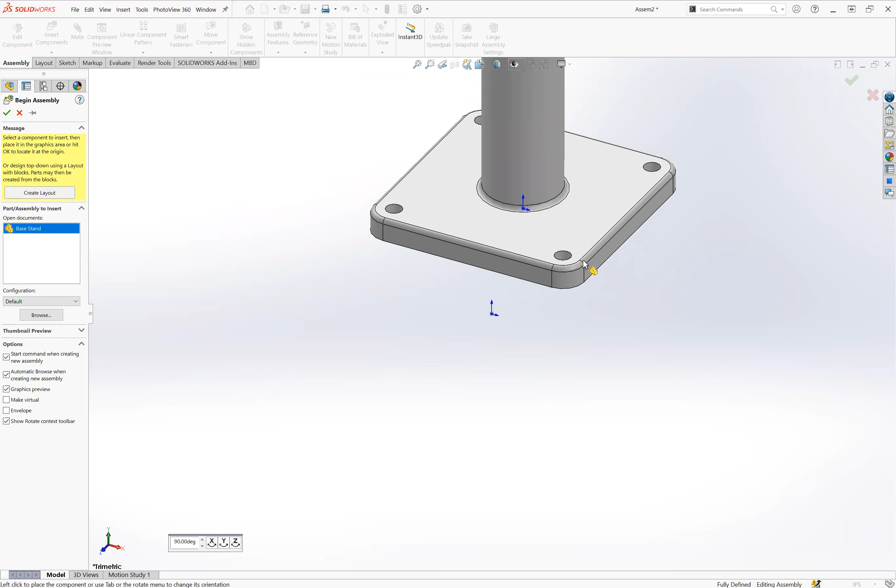You always want to attach your first part to the origin. Right now mine are hidden, so I'm going to click the arrow next to the eye and make them visible. I'll click that one and that one. Then I will just click on the origin right there. Now you can see there's an F next to base stand, and it is fixed to the origin. Therefore, this part cannot move.

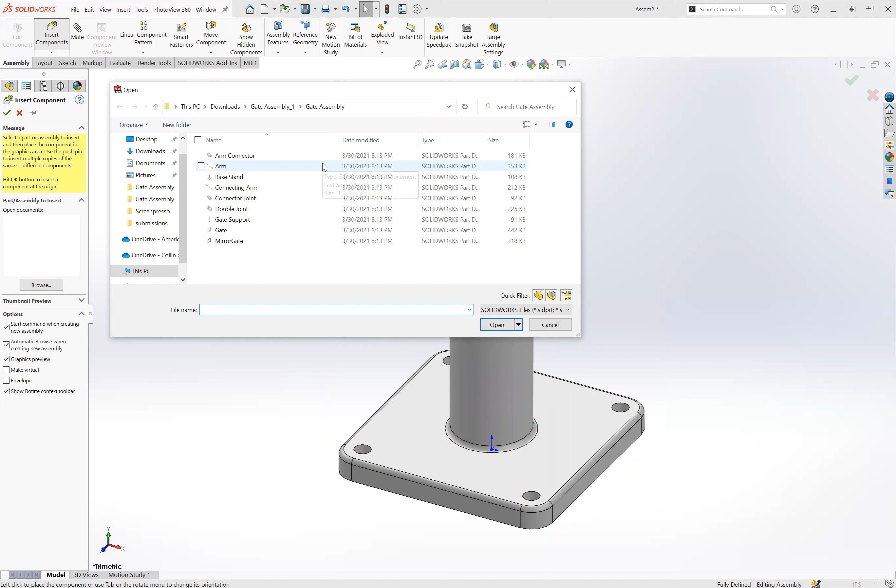Then I'm going to go into insert components. So click that, and I'm going to insert all of the other components. We have 8 total. We're going to insert the arm connector, and we'll just place that about right here. We'll do that again for the arm.

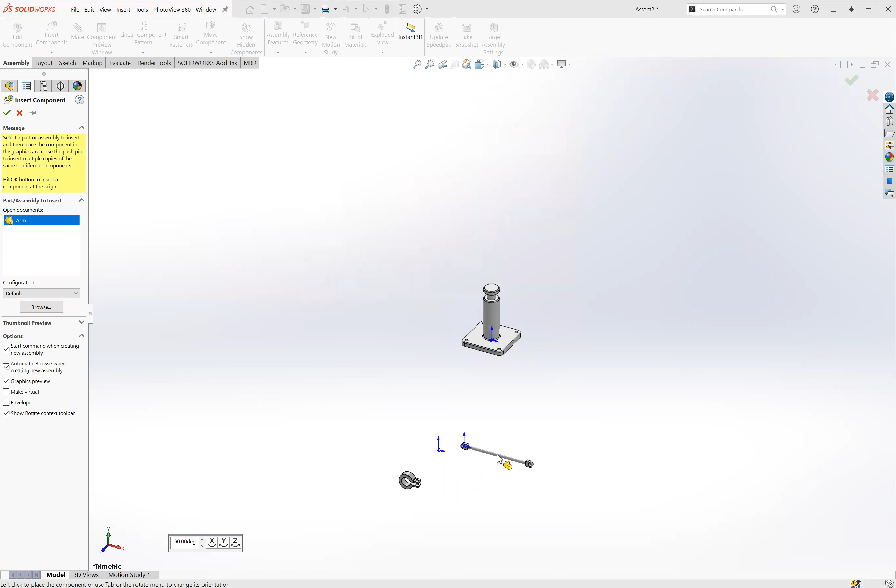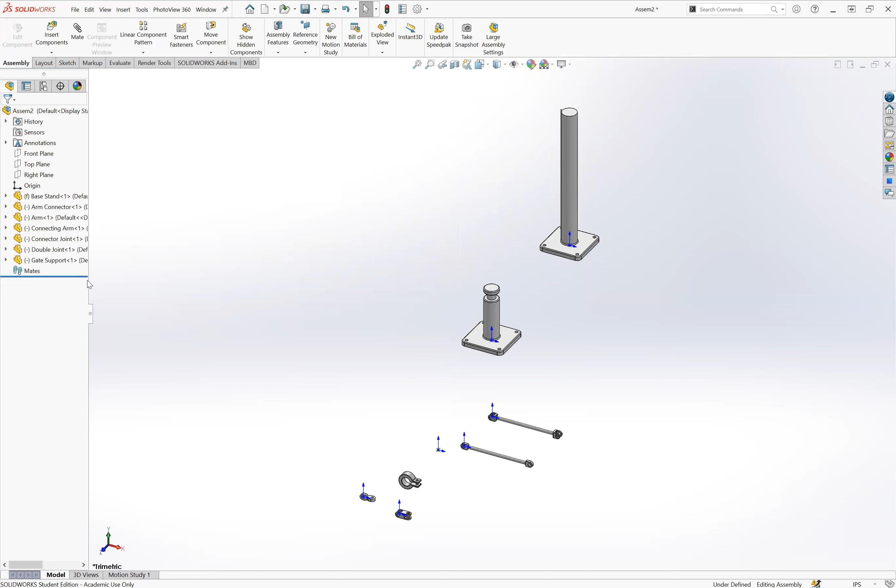You can hit enter on your keyboard to rerun the command. We'll do the connecting arm, the connector joint, the double joint, the gate support, and then we have one more, which is the actual gate. So click gate and open that and place that somewhere over here.

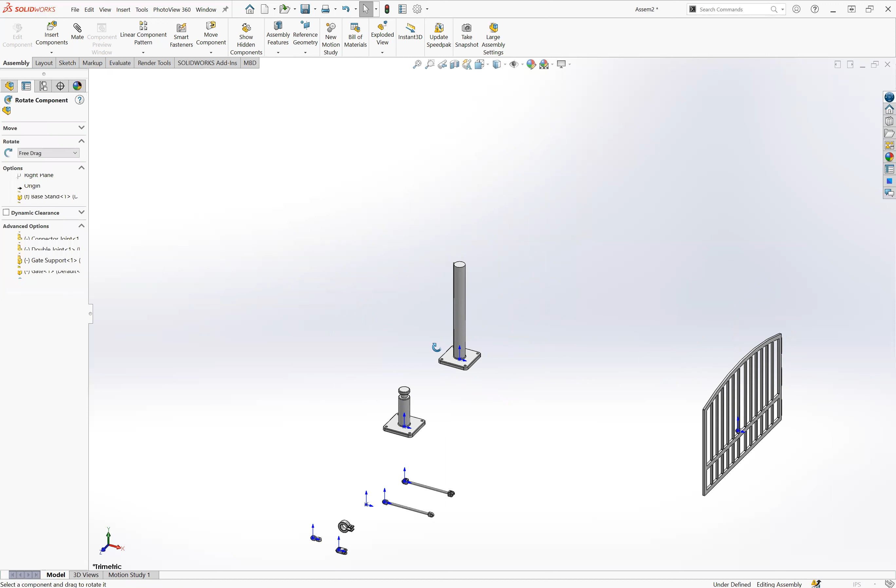All right, so now we have all of our components in here. Step 3 is to add a distance mate between these 2 components right here. But first we need to rotate it so that this area right here is facing us. So I'm going to click the arrow under move component and click rotate component, and then I'm just going to rotate it this way so that it is about right there.

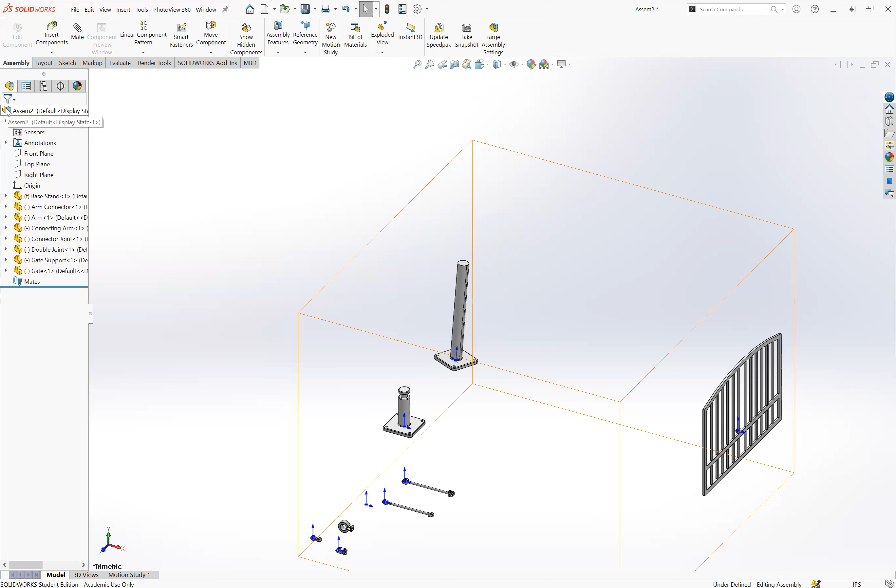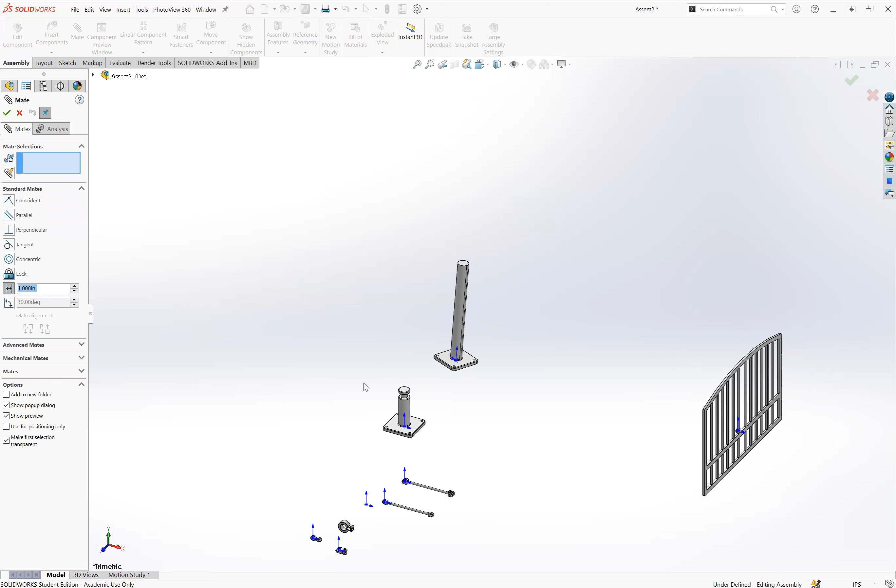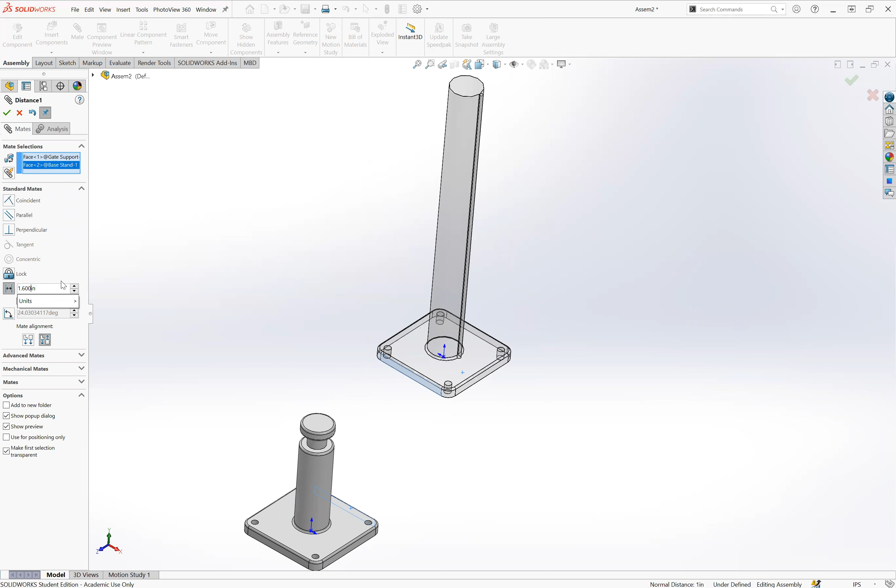And then I'm going to click check. All right, and now I'm going to add a coincident mate or a distance mate first. So we're going to click mate, and we're going to add a distance mate, which is this one right here, between these 2 faces here. So this face, and then rotate this over here in this mate. All right, and that's going to have a distance of 7. I'm just actually going to type in 7 inches here. And then I'm going to hit check. We know now that a mate is applied.

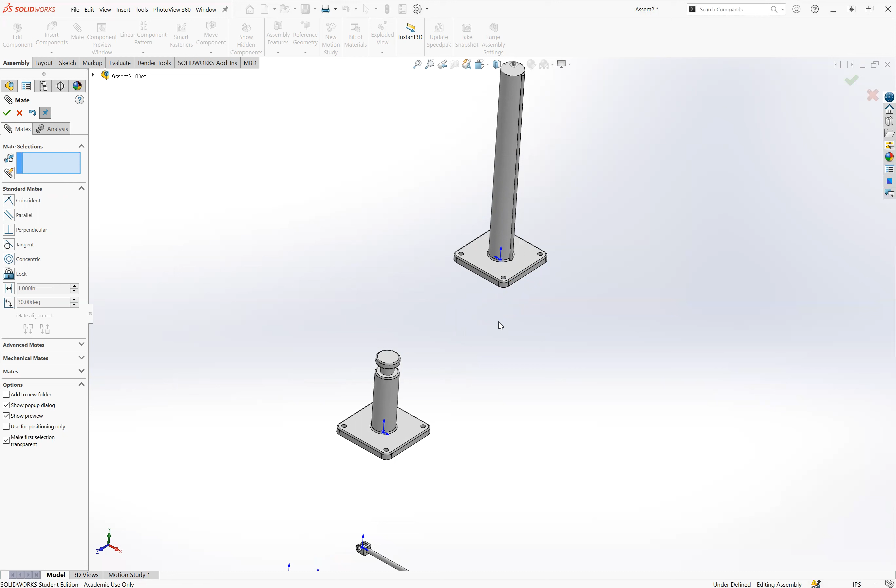Step 4 is to add a coincident mate. So I'm going to add a coincident mate between these 2 faces. Check. Right, and then I am going to add a coincident mate on the bottom 2 faces here. Check, and then I'm going to hit Control-7 to put this in ISO view.

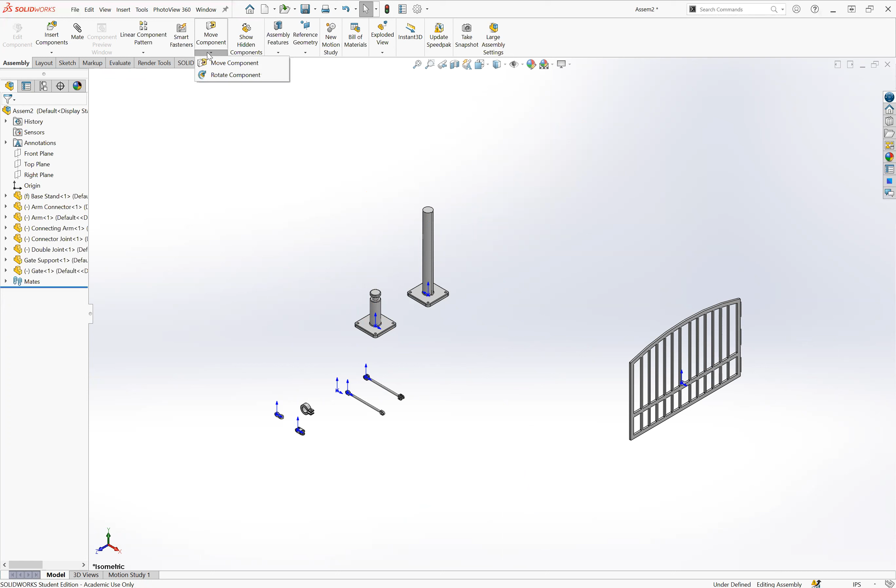All right, and then we are going to add a concentric mate between this part of the gate and this part of the gate support. However, I'm going to click check to exit out of that, and I need to rotate the gate first to make it easier. So I'm going to hit rotate component, then I'm going to click the gate and just rotate it and click check.

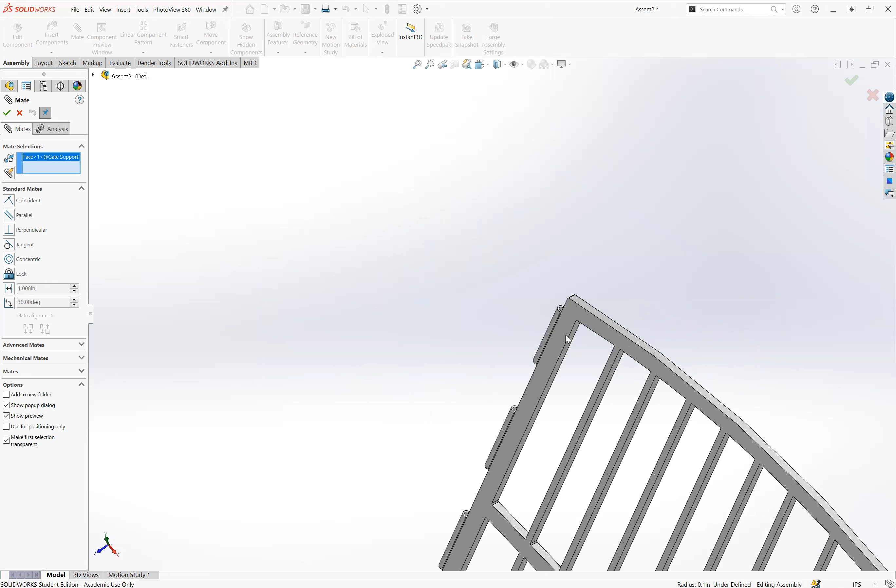Now I'm going to click mate again and add a concentric mate. So I'll just click this cylindrical shape here, and then I'll click the outside of this right there. And it automatically detects that we want to add a concentric mate. I'm going to click check, it's correct. And then I'm going to add a distance mate between this part of the gate support and the bottom face of the gate.

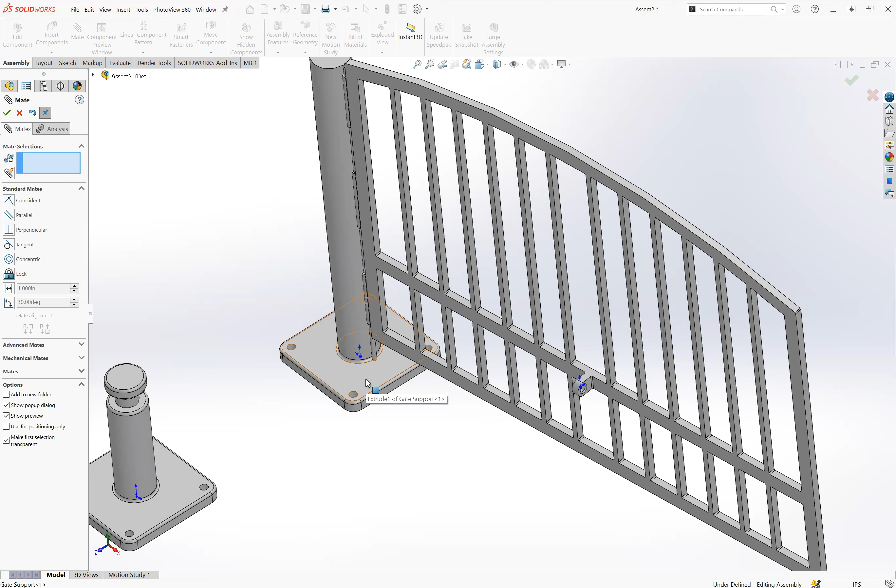So I'm going to put this over. We're going to add a distance by clicking distance, and we want a distance of 1 inch. Okay, and then we're going to click check.

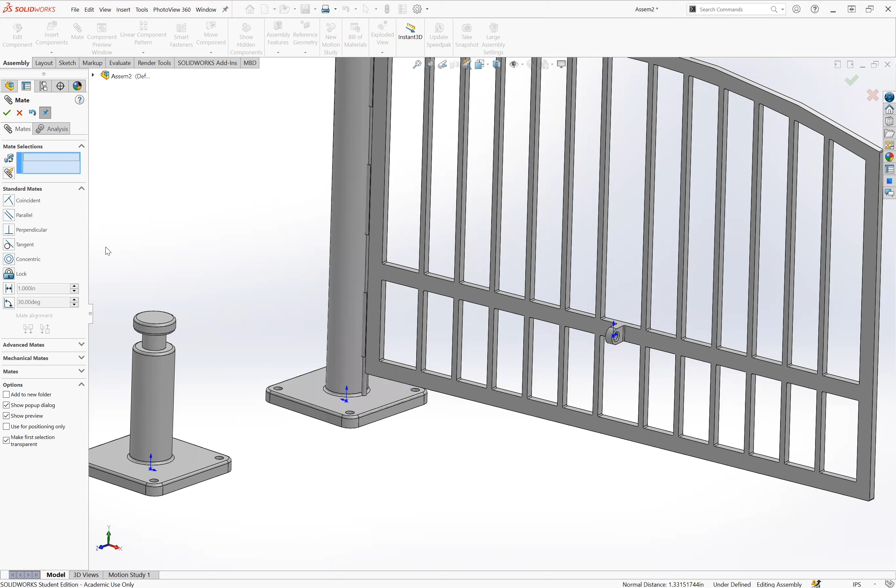Right, now we are going to move on, and we are going to add a concentric mate between the base stand and the arm connector. So I'm going to select this one, and then I'm going to select this one right here. And it guessed we want a concentric, it was right, so we're going to click check.

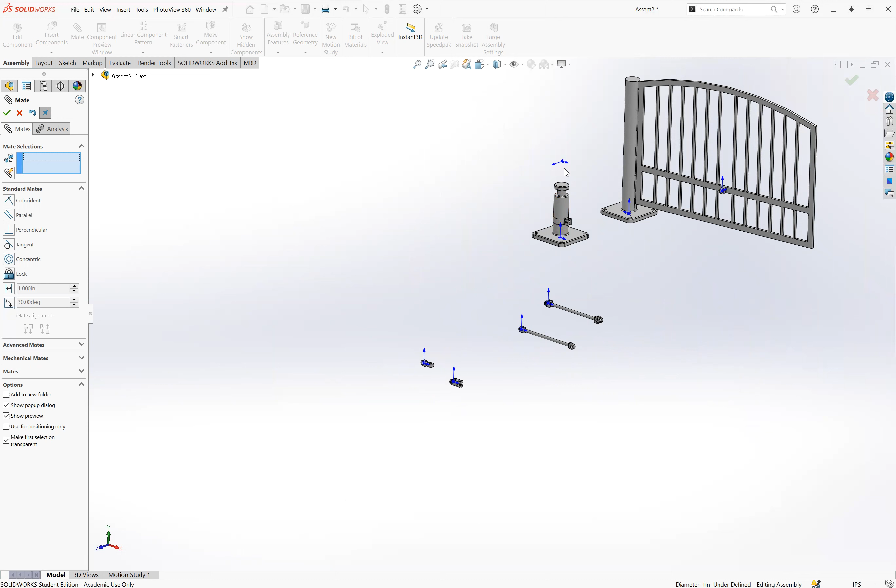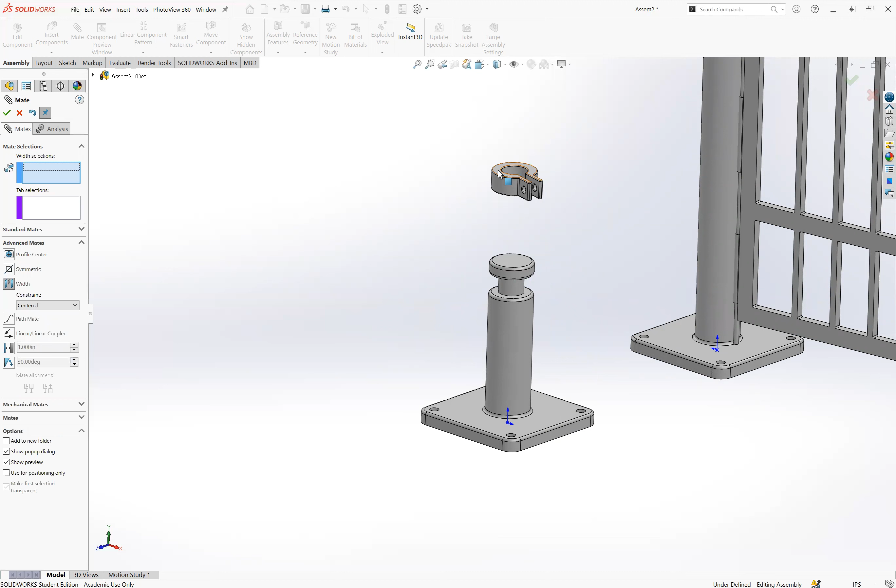Right, and then I'm going to actually click and drag this up so I can see it better. You can use the graphics window to move your components if it's not fixed or if it's not constrained. So we'll click advanced mates, click width, and then I'm going to click first this space and this space. And then for my tab selection, I'm going to click the two that I want in between, so those two faces. And then I'm going to click check, and the width mate just puts this in between the two faces that you select.

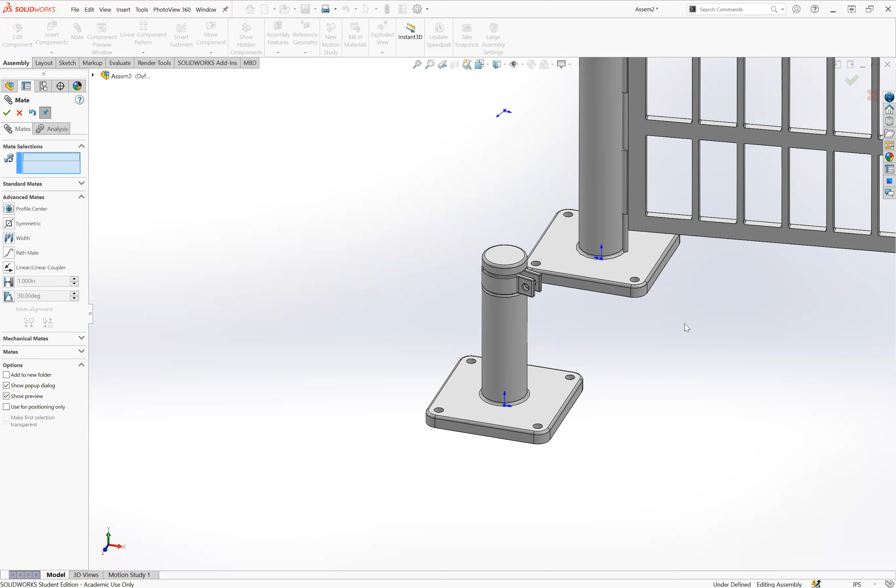All right, and then I'm going to add the arm connector to our assembly. So the arm connector is this one right here, and we'll first add a concentric mate.

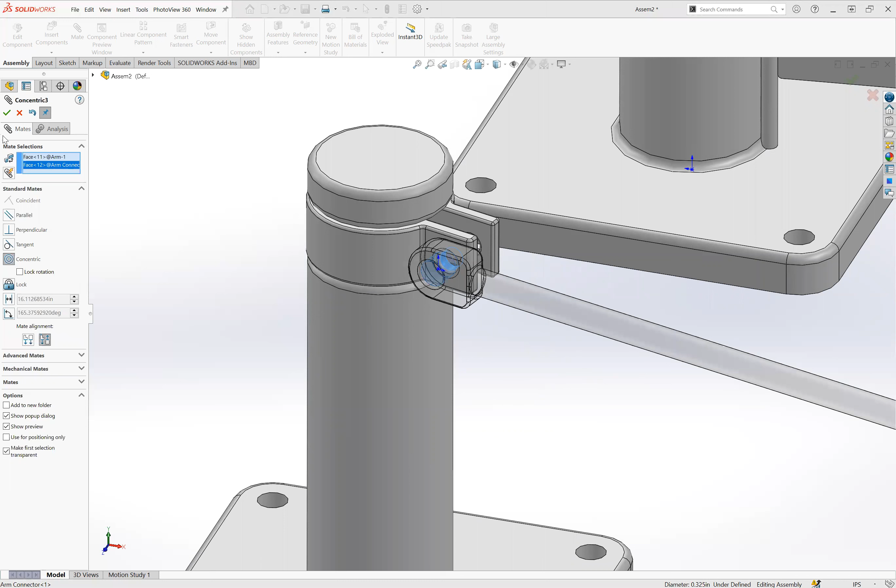And then a concentric mate with this part. I'm going to expand the standard mates, click concentric, and check. I'm going to move this out a little bit so it's easier to see. Now I'm going to go to my advanced mates and add a width. I'll click this one and this one, and then I'll click this face and this one that I want it to go between, and then check.

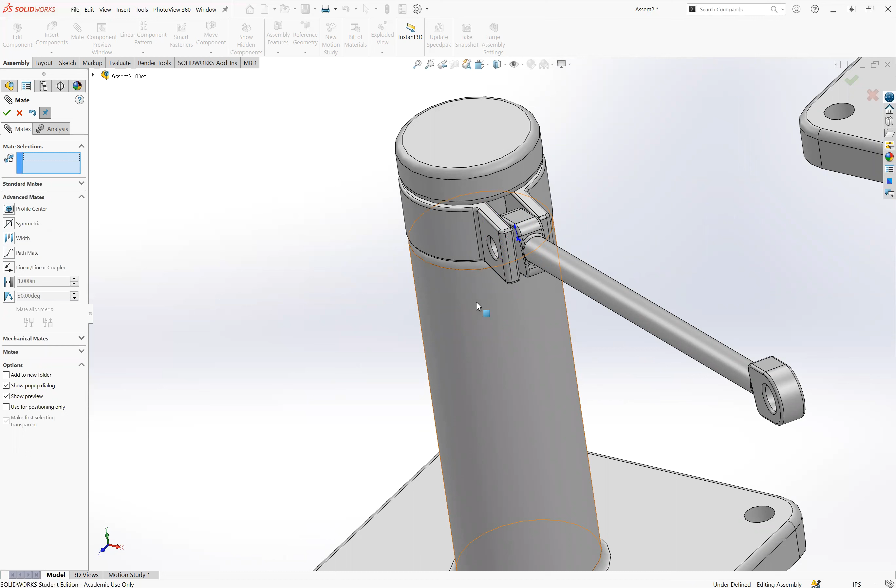Now we're going to move on to add another concentric and width mate. We're basically going to be adding concentric and width mates over and over again, so you'll have a lot of practice with that.

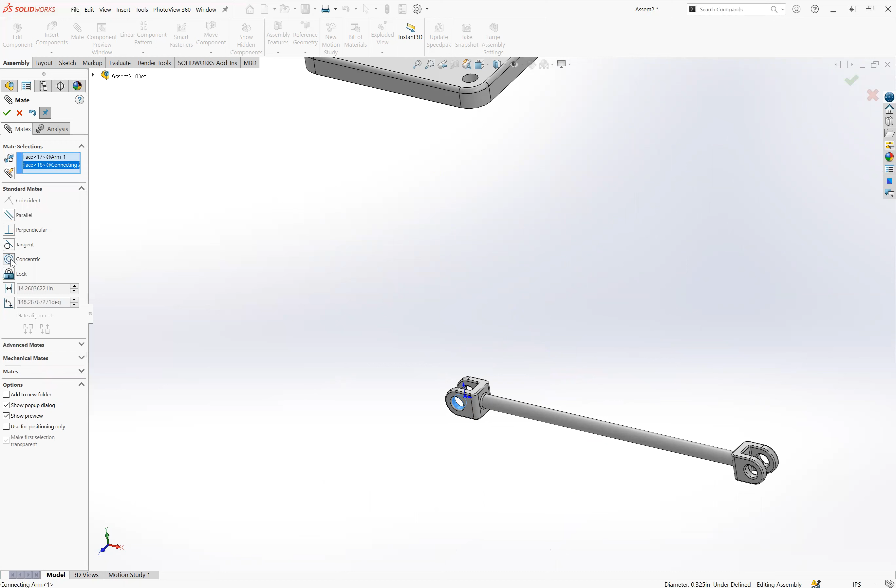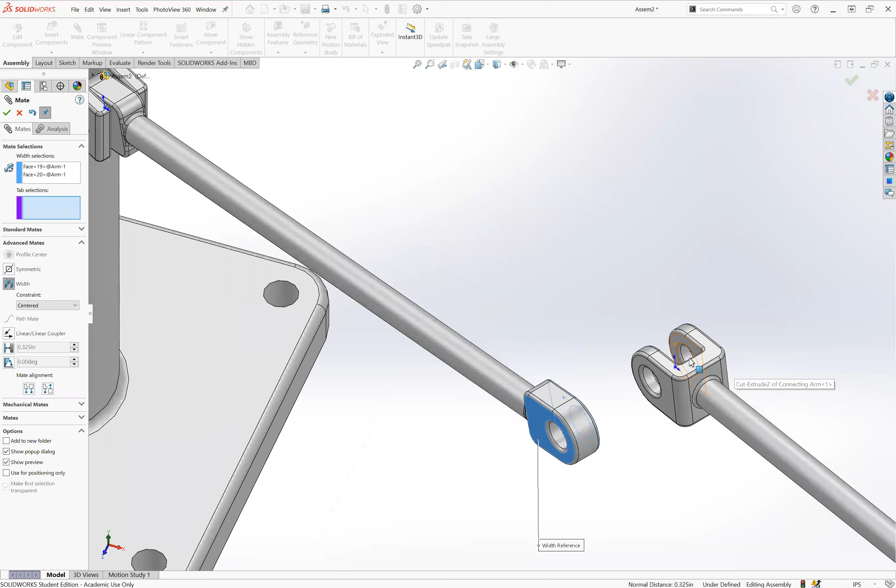We'll add a concentric mate between this one and the connecting arm. Just click on the connecting arm, expand standard mates, and click concentric. Check. Now we'll just need to add a width mate between the two. We'll expand the advanced mates, click width, and select these two faces, and then select these two faces here. Then click check.

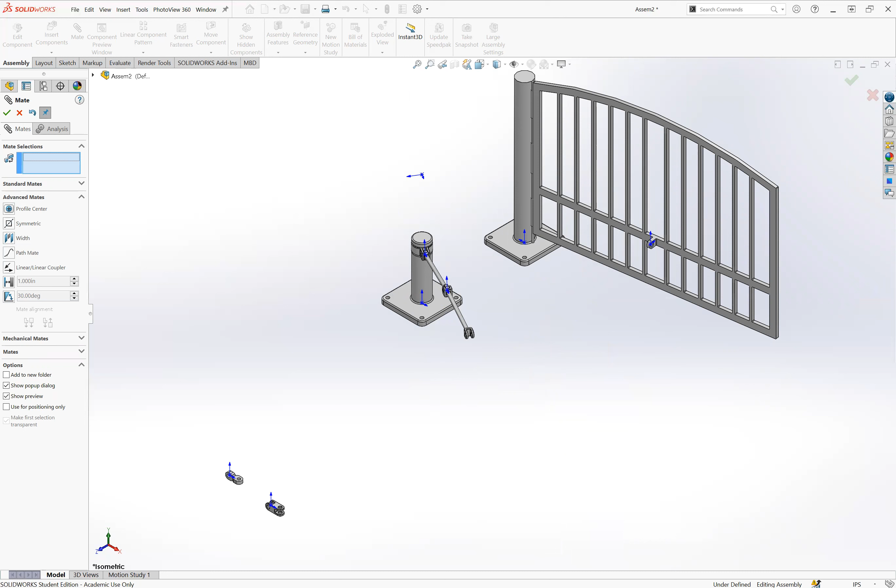I'm going to hit Control-7 to put this in ISO view. And then we are going to add these last two components here. So this one's going to go first, same thing, concentric and concentric. And then we are going to add a width mate.

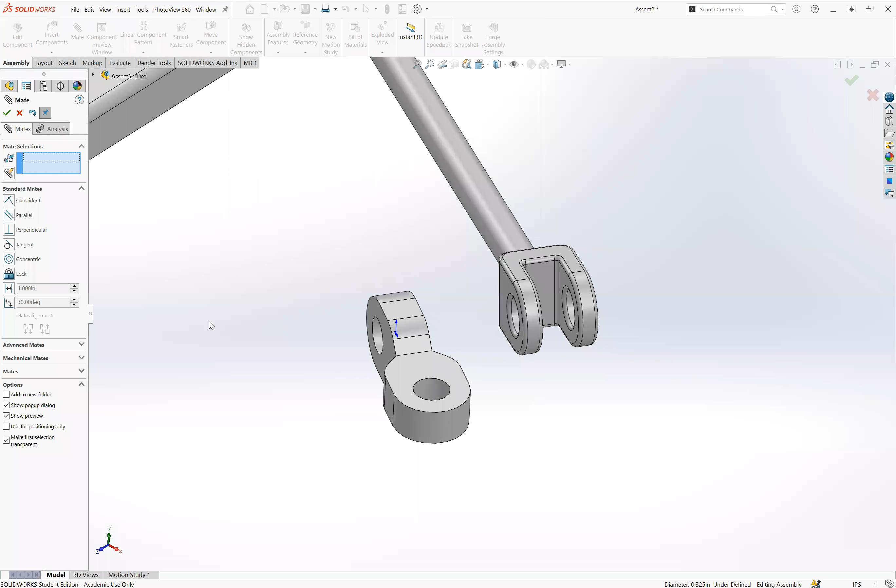We're going to expand advanced mates, click width, select these two faces here, and then select these two faces. Then click check.

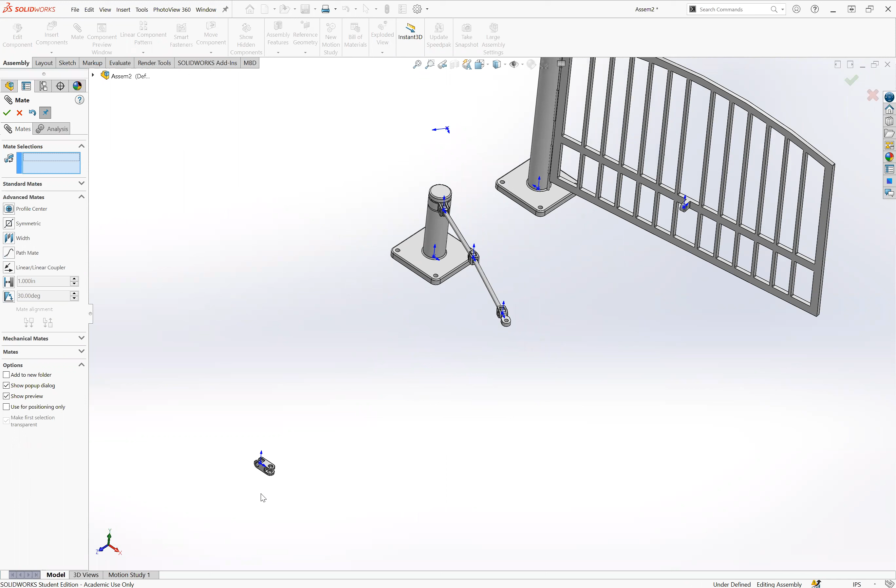Now I'm going to add the last component right here, and we're going to do the same thing, concentric and width. So we'll expand the standard mates. I'll click this face here, and then I'll click this face, make those concentric, and check.

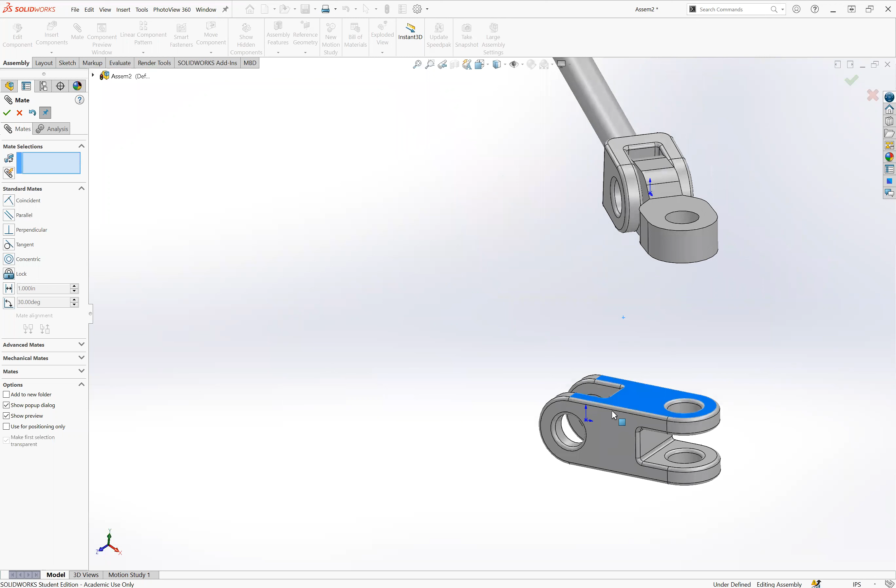And then I'm going to move this down a little bit to make it easier for me. I'm going to expand advanced mates, click width, select these two faces, and then I'm going to select these two that I want it to go between. Then click check.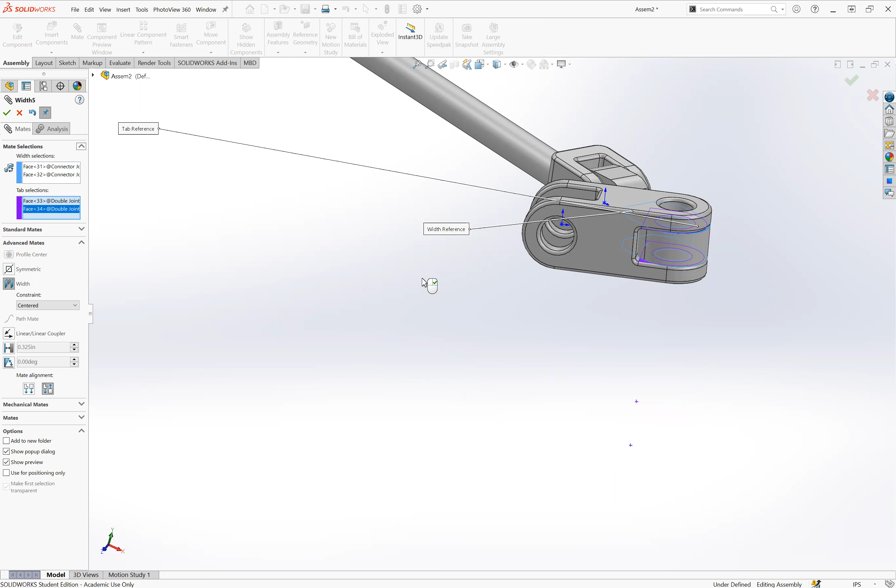All right, so now we are moving to step 6. Did click check, okay, and then we'll click check again because we are done adding mates at the moment. So I'm going to move this over a little bit.

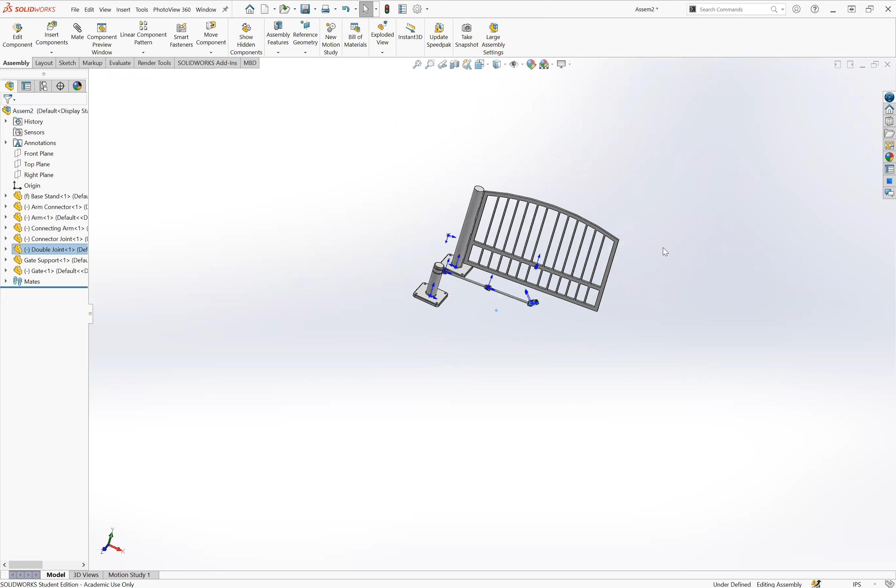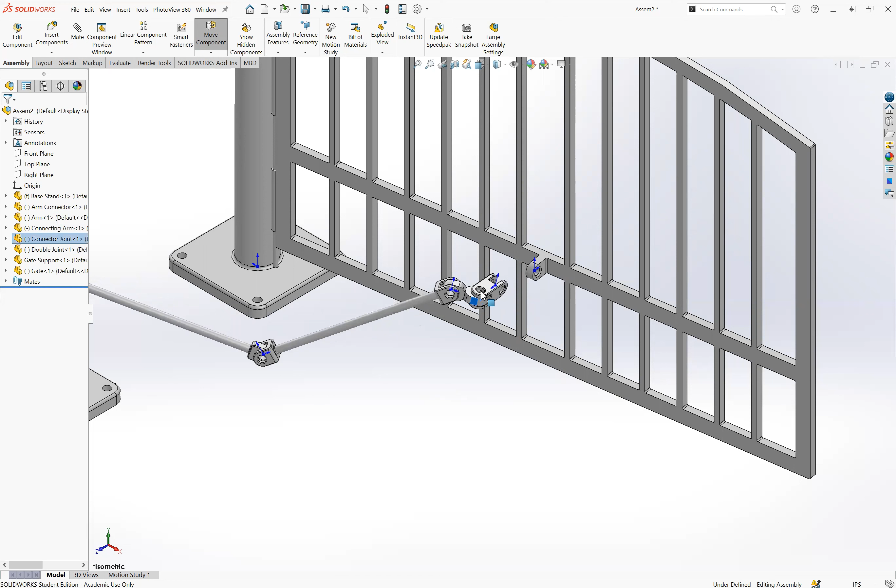Alright, and then I'm going to hit Control-7. So it tells us to put the gate assembly similar to this. I'm going to move this out a little bit. You can use the move, or you can just kind of use this free drag right here. Sometimes it's easier just to use the move because you can kind of have more direction on where you're going, but I think this will do.

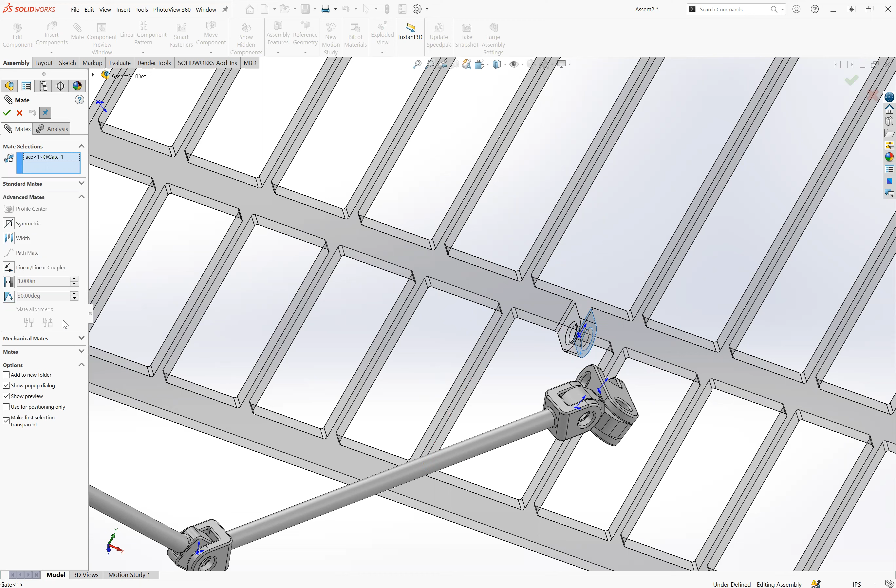So then we are going to go back and first add a width mate, then add a concentric mate. So I'm going to hit mate, and then I'm going to select these two faces of the gate. Whoops, I need to expand advanced mates and then add width. So I'll hit that face and that face.

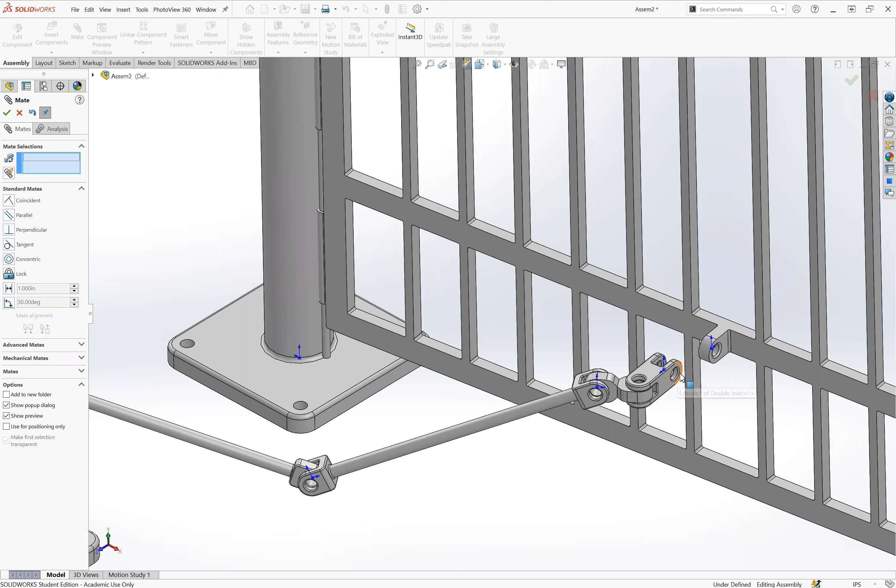And then I'll go in and hit two faces I want it between. Alright, and then hit check. And then I'm going to expand standard mates and add a concentric mate here between these two faces and click check.

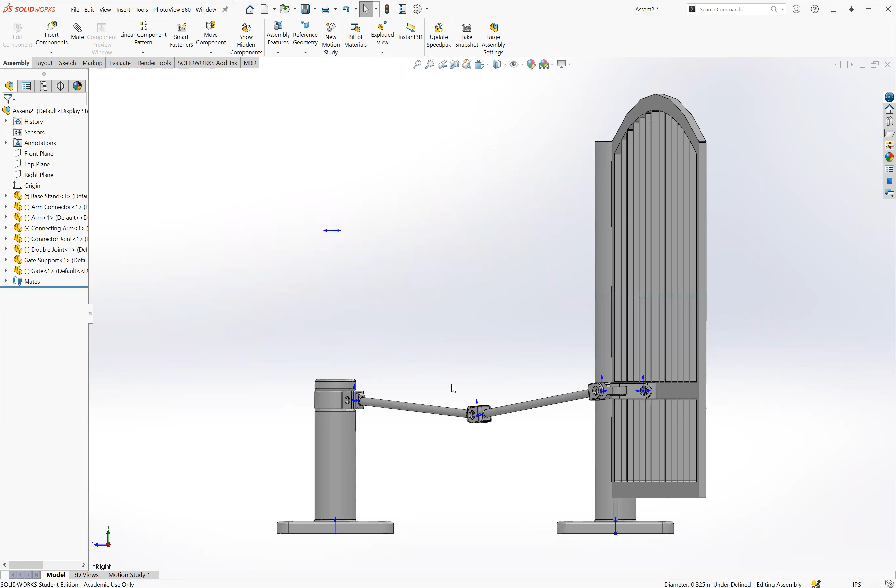And now we are on step 7. So click check again because we're done with that. And I'm going to hit Control-4 to put this on the right side view. And I'm just going to move this gate. You can see that it moves properly, and I'm just going to move it kind of in the center there. Then I'm going to hit Control-7.

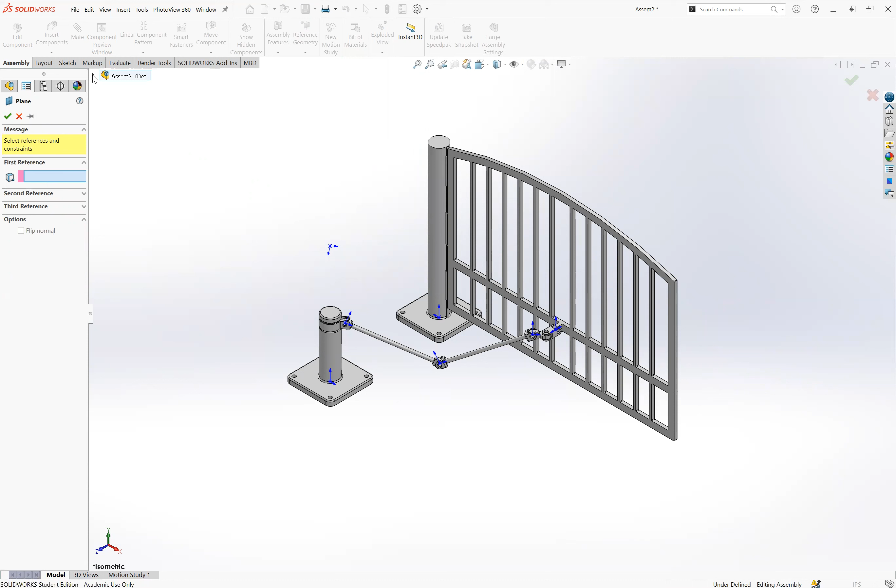So now we're going to create an offset plane. In the assembly tab, click reference geometry plane. You're just going to do this the same way we would in a part file. So for our first reference, we're going to do the right plane, expand your feature manager tree, and then select right plane. The distance is going to be 26.125 inches. And then we're going to click OK.

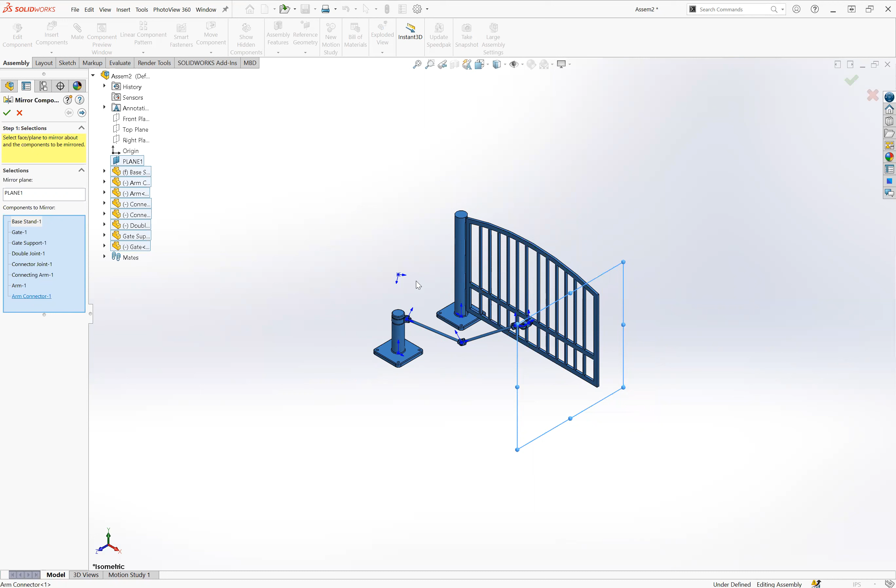And then we are going to mirror all of these components using this plane 1 as the mirror plane. So to do that, we are going to go to Insert, Mirror Components. The mirror plane is plane 1, or you can click on it or find it in your feature manager design tree. And then for components to mirror, you can just do a selection window around these, or click here, hold shift and click the bottom here to add all of the components. You should have 1, 2, 3, 4, 5, 6, 7, 8 parts total. And then we're going to click check.

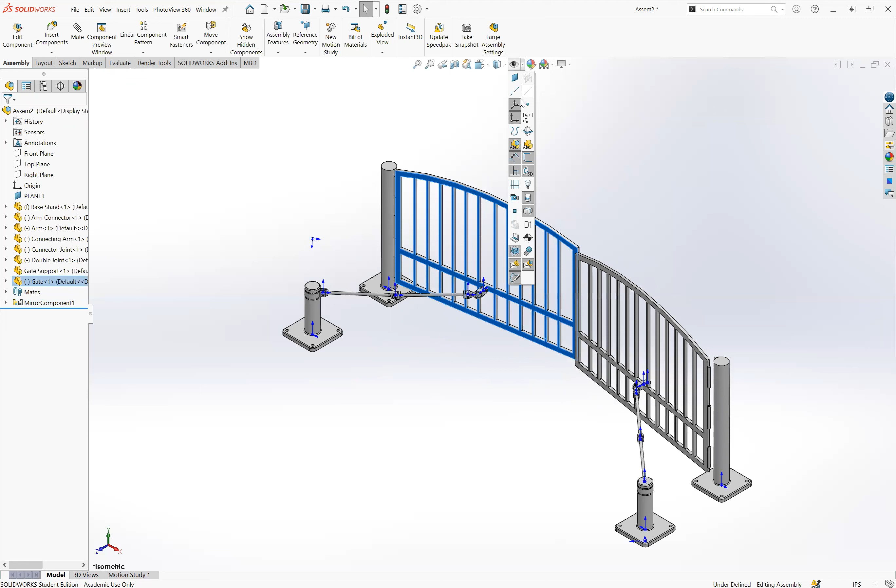And you can see that this is mirrored. So when I grab one side, it opens properly, they open together here. I'm going to hide these origins so it looks a little better. And then that is all for the gate assembly.